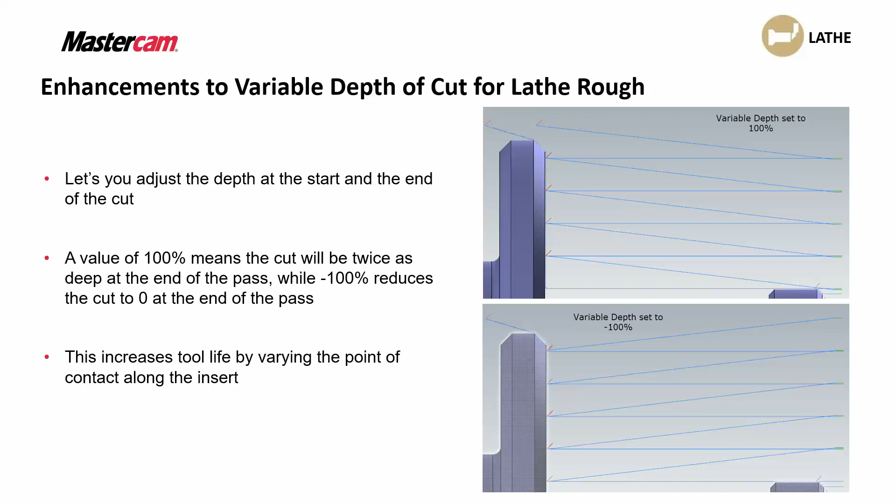Next thing I'd like to cover is dynamic rough has gained the ability to use lead in and lead out on semi-finished passes. So it's just like the lead in and lead out you've seen in plenty of other toolpaths, but now we have the control to take care of lead in and lead out for the semi-finished passes. So I'd like to show you guys how to do both those things I just mentioned.

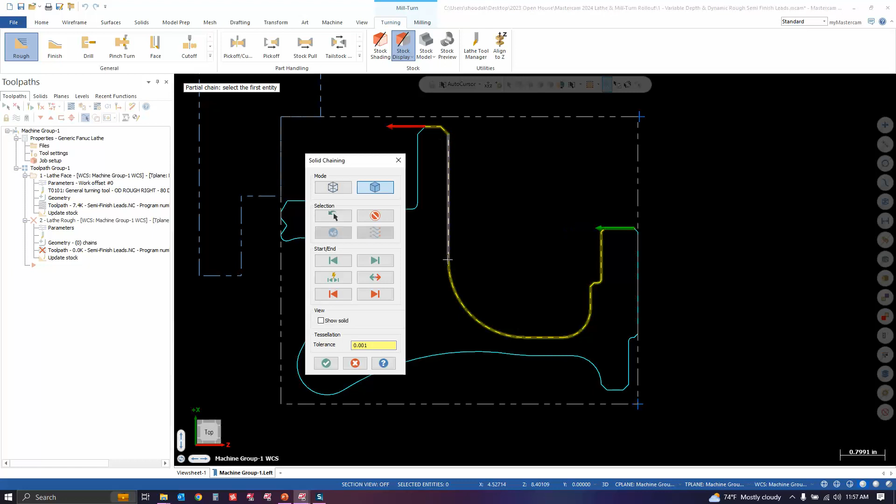So what I've got here is a part. I'd like to rough this down using lathe rough and then hop in with a dynamic rough to finish the groove portion. So I'm going to hop into my lathe rough toolpath. I'm going to chain the top here to the top here, hit the green check.

And for starters, what I'm going to do is I'm just going to set the depth of cut to 200 thousandths with no real change. Use lead in and lead out and use stock for outer boundary. I'm just going to turn off the rapid retract motion to see it a little better. Pretty standard pass. What I'd like to do is I'd like to introduce that variable cut depth.

So what I'm able to do here is, let's just say we add 50% depth of cut. I hit the green check. What we're going to see is the first pass remains the same, but the next pass is going to start at a 50% larger depth. So we should see 300 thousandths start a cut here and go to 100%. So I go to 100 thousandths.

On the next pass, we're going to see the opposite. It's going to start at 100 thousandths and it's going to end at 300 thousandths. Again, just to reiterate, what this does is this is going to change the edge of which the insert is cutting with, hopefully using more of the insert, hopefully reducing the chance of chip out.

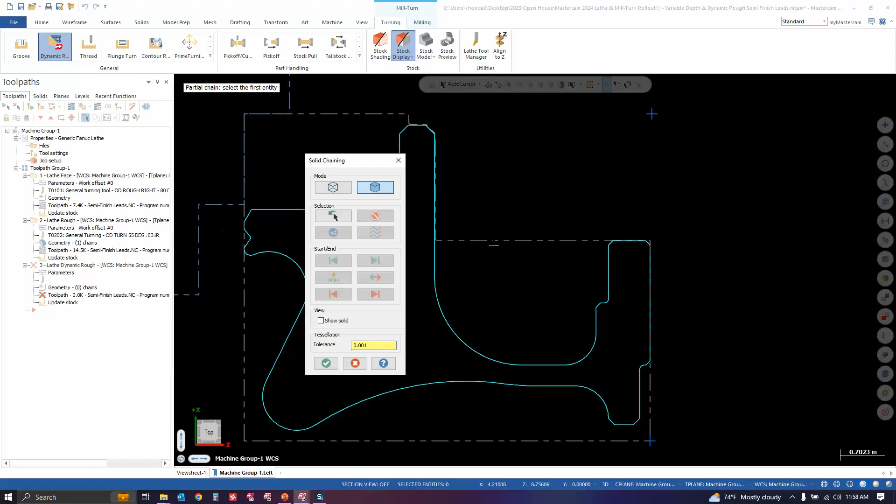Next thing I'd like to cover here is dynamic rough. So I'm going to go roughly the same area. I'm going to start at the chamfer there, end at the chamfer here, and hit the green check. I want to make sure that I'm choosing a full radius tool. Only full rad and button tools are supported for lathe dynamic rough.

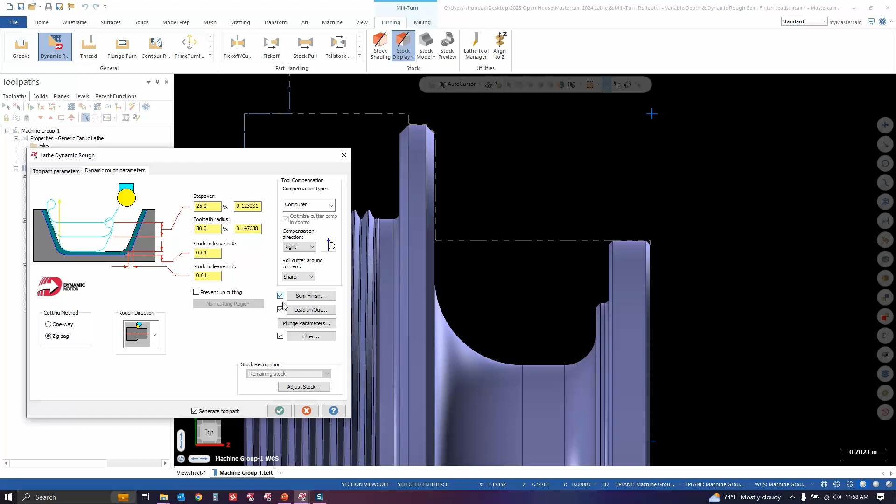I'm going to go to the dynamic rough settings, set my step over to, let's just say, 25%. We're going to go to 30% for toolpath radius. I'm going to turn on my semi-finish, and let's just for now turn off lead in and lead out. I'm going to hit the green check. It's going to take a minute here to think, and we're going to see a toolpath create.

Once this generates, we're going to see that we have now violated the tool clearance boundary. I'm going to ignore this warning for now and hit the green check. What we're going to find is that

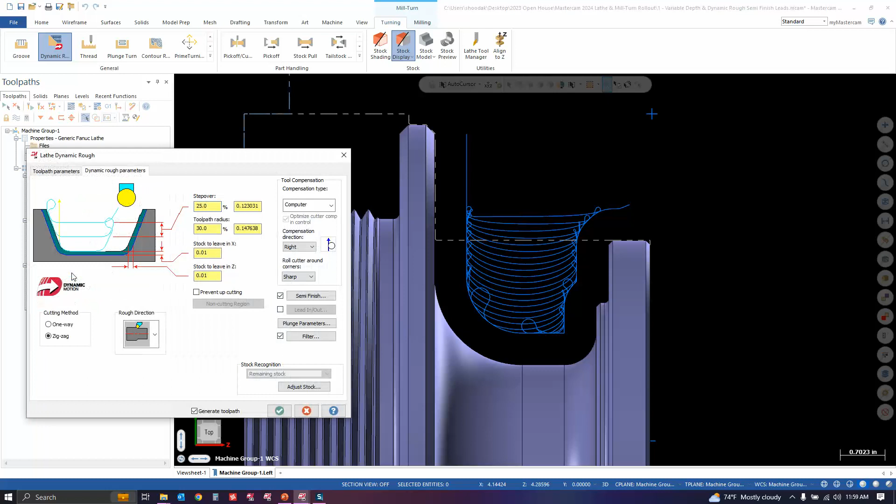if I go into the parameters here and I enable lead in and lead out, and I head over to the semi-finish lead in, tell it to go directly down or even tangent, I can do the same thing with the lead out and go directly off to the side. I'll just keep it like that. Hit the green check, and we should find that that error now goes away.

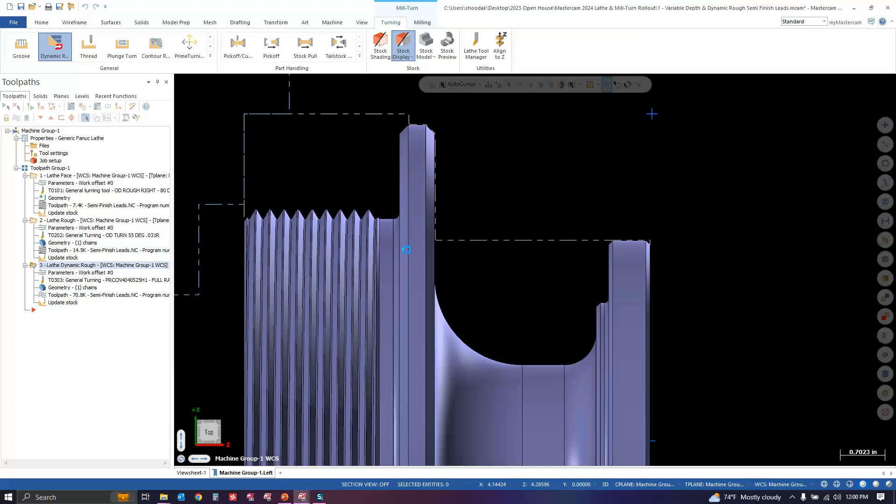And we do. So everything is all even keel in the world again, and we're able to continue on.

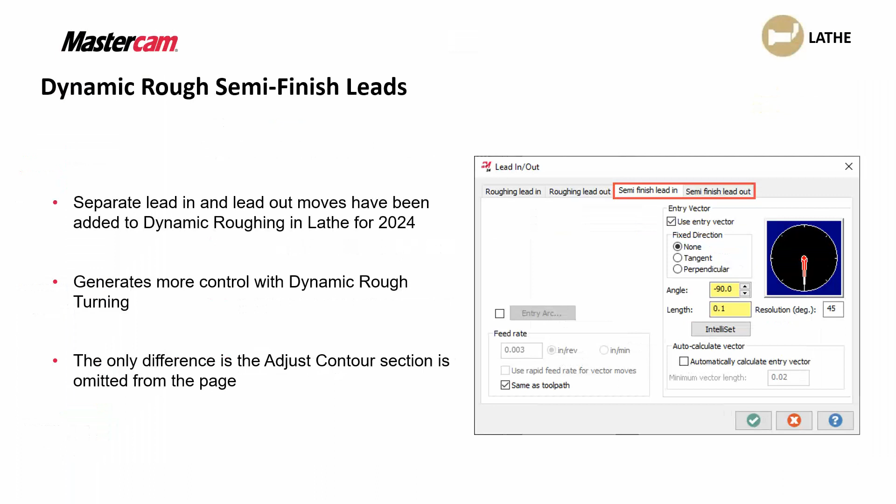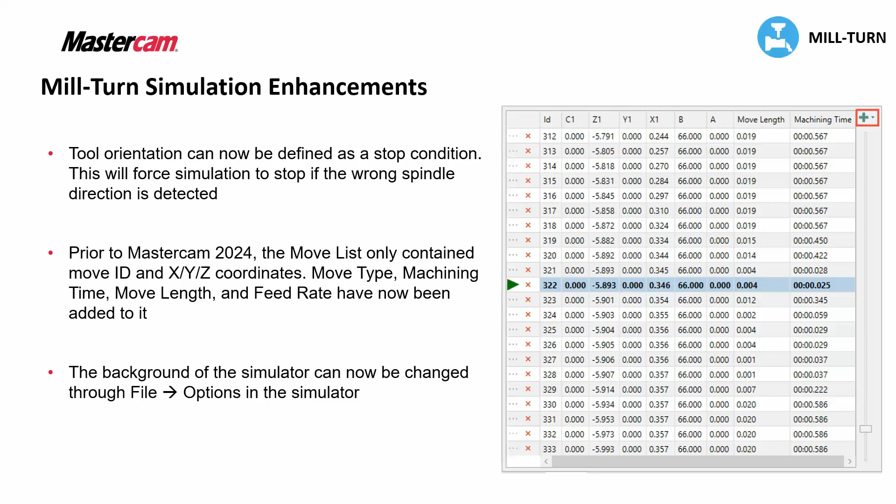And the last thing is now stop conditions have been added to incorporate tool orientation. So what does that really mean? Well, that just means if your left spindle should be rotating clockwise, but it's rotating counterclockwise, Mastercam is going to let you know. It's going to stop the machine, stop the simulation, so that you can go back and fix what's wrong and then be able to continue on your merry way with your new fixed simulation.

Another new thing that was added was creating a new spindle origin for spindle move operations. So what this does is this gives you the ability to generate a new set of planes whose origin matches the new location that you select. It gives the ability to associate a new origin with the new position. This gives it so that you can add a G55, G56, G57, and have your move work off that position.

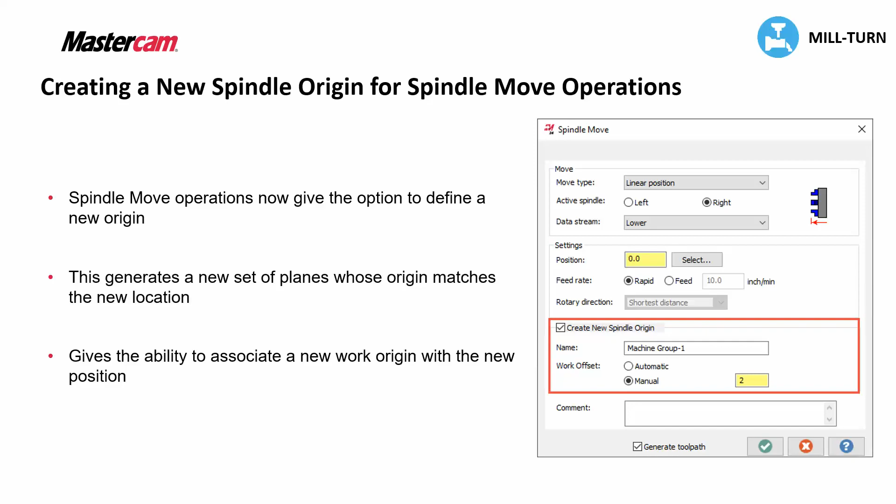B-axis contour enhancements. There's 3 of them this year. So the first one is the adjust stock button. This is going to look a little different than your traditional adjust stock in other toolpaths. This is going to show up with 3 little white dots on each start and end portion. You're able to snap to these different positions as a quick way to move through your toolpath. So we can extend the cut, add a chamfer, remove the chamfer just by clicking on one of these 3 buttons. You can move it anywhere else, but the 3 white dots that show up are easy snap locations. I'm going to show you guys this one here in a second.

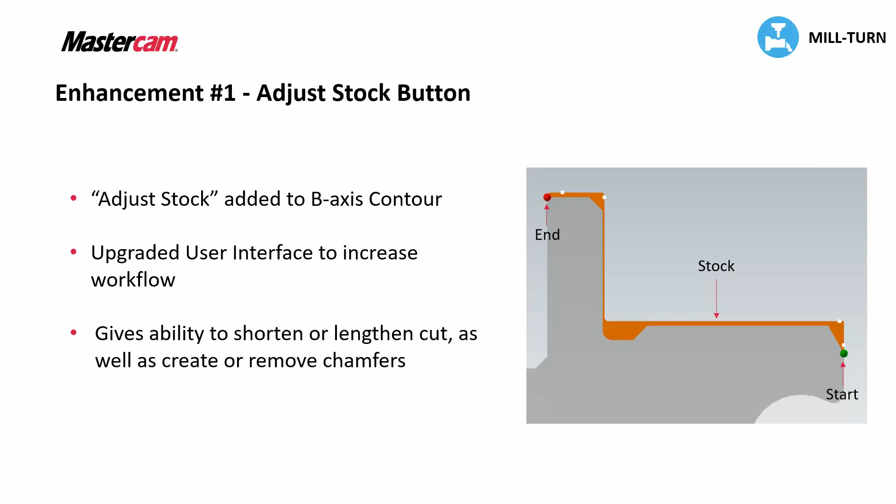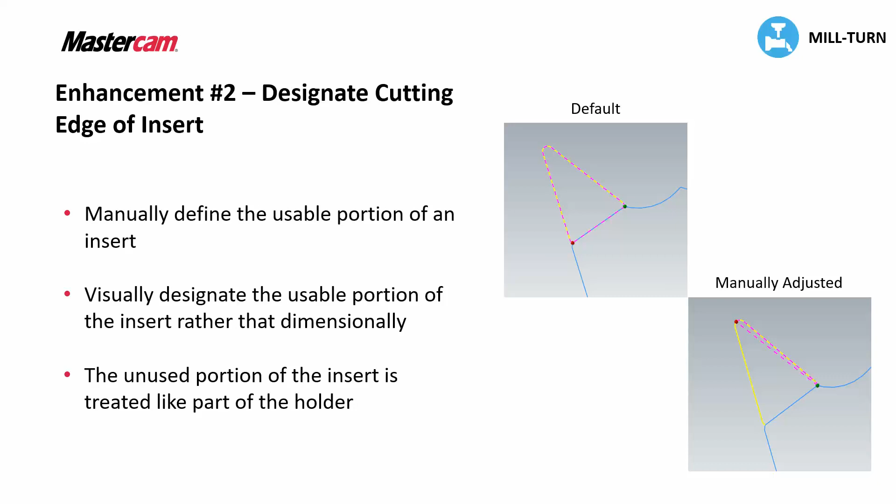Another thing that got added is the ability to designate a cutting edge of an insert. So whatever tool you're using, you can actually select where you'd like to cut with that insert. This gives a little bit more control to the B-axis contour, and this will actually adjust the toolpath to compensate for your selected geometry.

Another thing, the final thing that got added to B-axis contour, is the ability to change the tool axis control option to modified. So prior to this, you were stuck with automatic and manual. Automatic was pretty much Mastercam deciding most of the toolpath motion with a little bit of room to tweak. The other option was creating geometry, creating toolpath vectors, and having the toolpath follow those vectors. Well, this is a little bit of a combination.

So what you get to do is you're able to actually alter these green arrows, and I'm going to show you this here in a minute. You're actually able to alter these green arrows and change where the toolpath sits at this certain position. Nice quick way to make a very controlled toolpath. So let's talk about that here next.

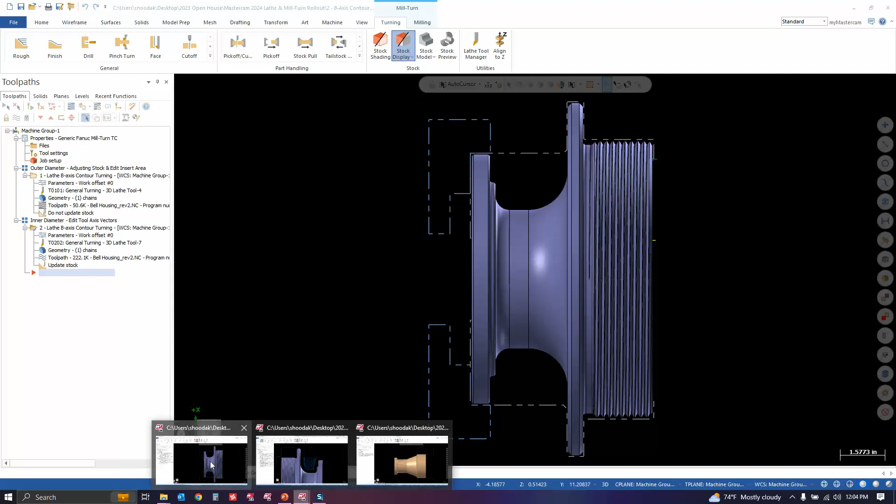So I have another toolpath over here, another 2, both B-axis toolpaths. So looking at this, we got our first toolpath here. I'm going to hop into parameters, and we're going to take a look at adjusting stock. Right now we're getting a toolpath that kind of starts off into the material and ends up before the material ends. I'd like to make it so that I maybe start a chamfer down here and elongate the cut along the end. So if I go to the second last option down here at the bottom called stock, I can hit my adjust stock button.

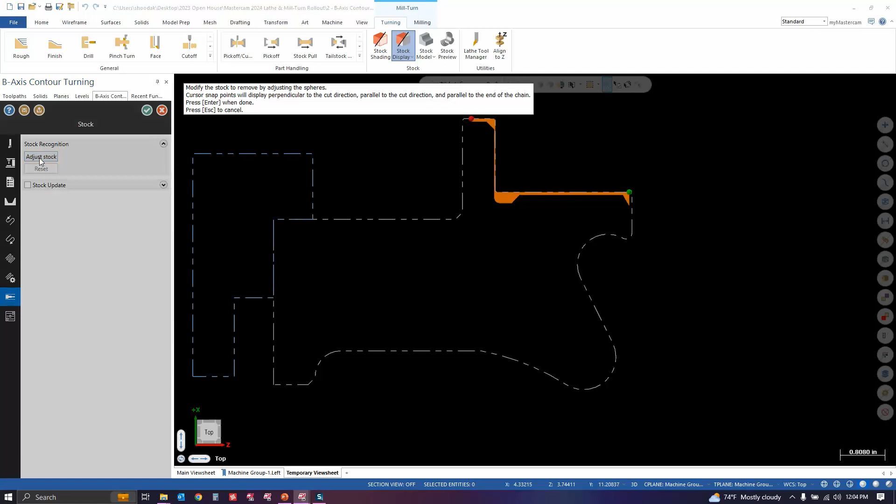I'm able to grab my green dot and bring it down to this far white one at the end, and I can actually snap to it. I'm going to do the same thing with the red one here. The minute I click or hover over the red one, I'm going to see those 2 other white dots appear. Notice as I'm rotating, I'm seeing the orange area change. That is also indicating where my cut is going to end or start, depending upon which one I'm selecting.

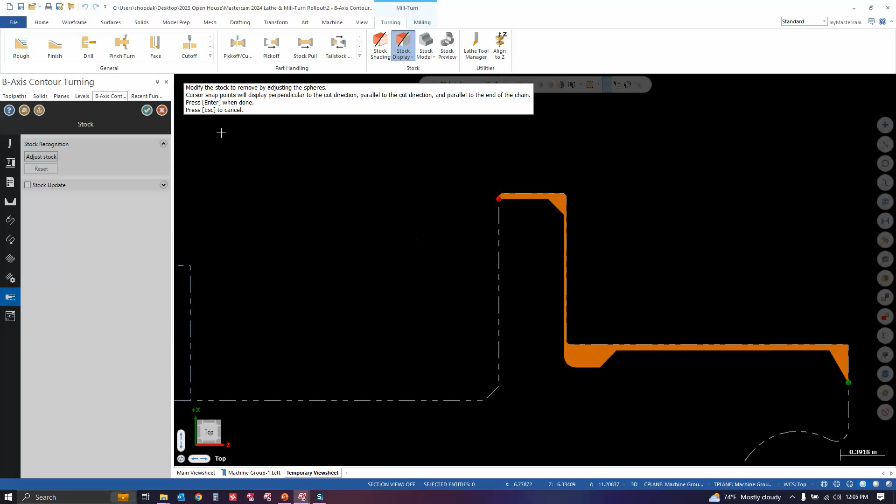I'm going to hit enter, and I'm going to hit the green check and regenerate my toolpath. And what we're going to see here is what I set out to do is going to be completed. I'm going to elongate my chamfer here, and I'm going to elongate my cut here at the end.

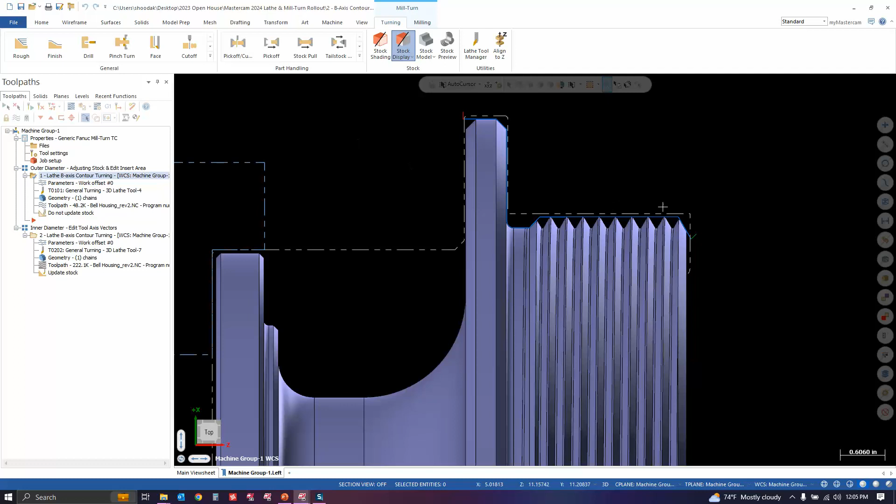Looks great. Next thing I want to do is adjust the cutting edge of my insert. So one more option up, going advanced motion control. Where it says maximum insert depth, I can go down to manual, click on this icon here called edit depth, and we're going to see my tool populate, my insert and holder combined.

I'm going to grab, again, my start or my end dot, and I can actually see where the insert's going to be cutting with. So what's going to happen is, when I do this, what's not highlighted is going to act like a holder, and it's going to make sure it avoids that cut. So if I have this pink area selected, it's going to avoid cutting with the top portion.

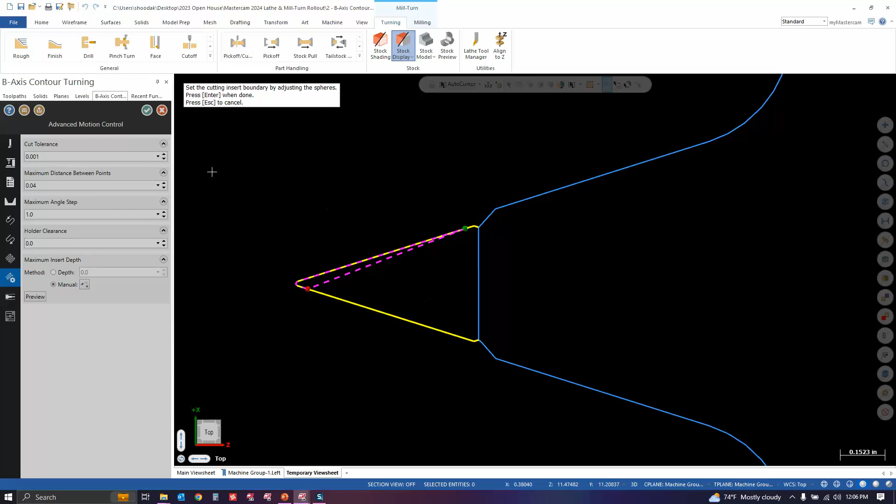What I'm going to do here is I'm going to slide this cut up, maybe this down here, and I'll hit enter and the green check, and we're going to see that the motion now fits that geometry. So again, it's going to prioritize cutting and prioritize avoiding the area that's not highlighted.

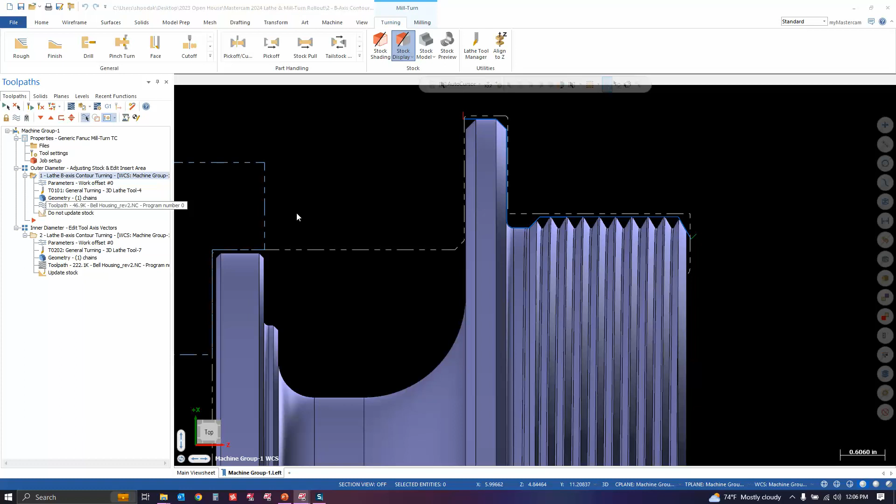If we play the toolpath, we're going to see that it stays in that area. Make sure that it doesn't cut that way. Looks good.

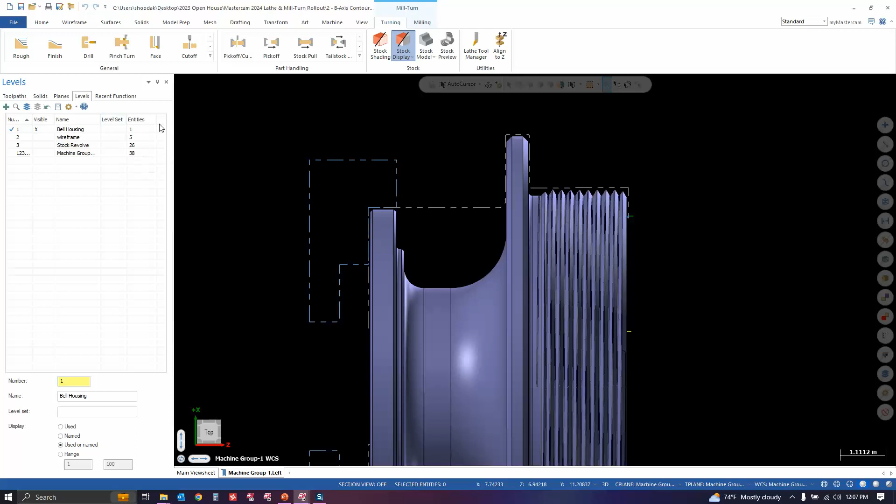Last thing I want to take a look at is this ID here. Now I can't see it, so I'm going to go to levels, and I'm going to go turn on planes, and I'm going to turn on my section view. And this will make it so that I can see the inside of my part. If I go to my toolpath and I go to my parameters here, and I go to one more option up where it's basic motion control.

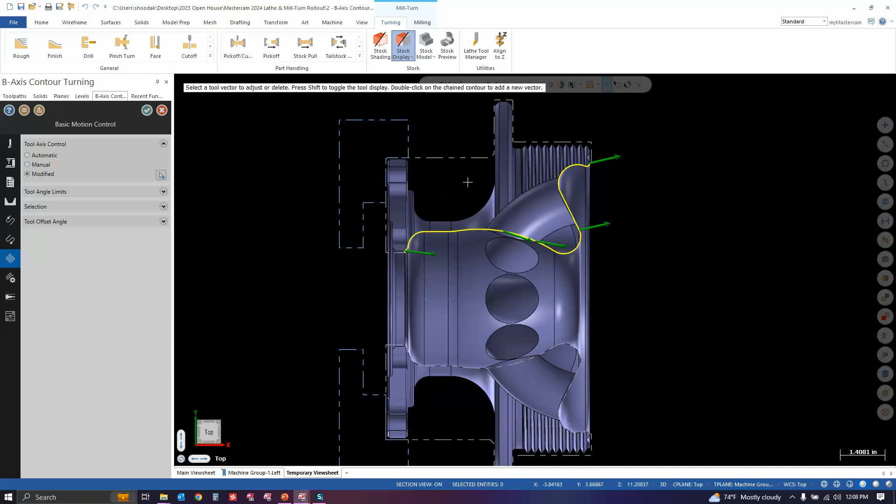Prior to 24, I had automatic and manual. Now we have this modified option where I can select modified and click my edit vectors. And what I'm going to see are 5 arrows populate. And if I hover over one and I click one down, if I rotate this arrow around, I can actually see my tool and my holder. I can actually change the position my cut starts or rotates to, and we're actually going to see here if I go too far in one of these directions, maybe on another spot.

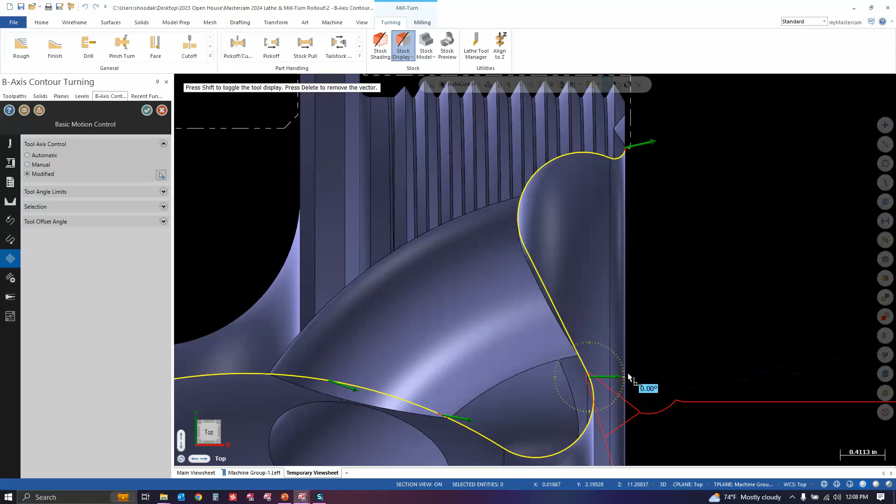If I hit escape real quick and go to over here, I can actually see if I tilt too far that I actually create an area where my holder and insert collides with my cutting edge. So this is a nice quick way and a safe way to make toolpath motion altered in just a couple seconds.

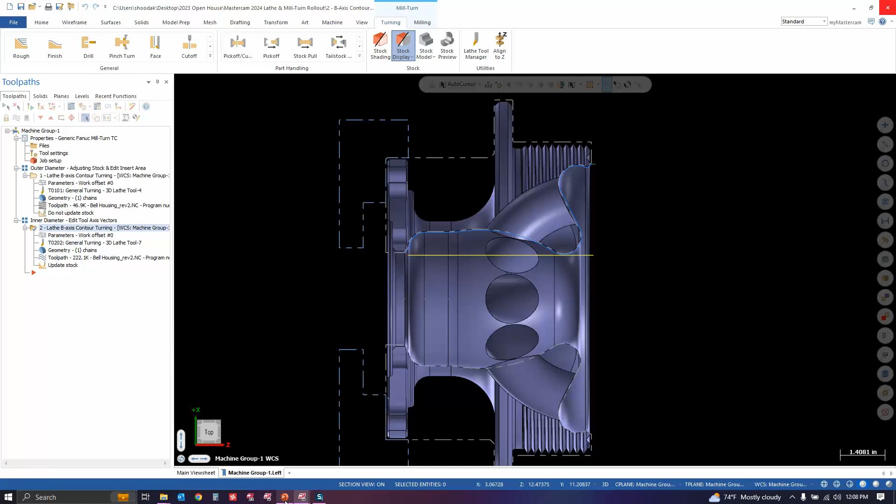All right, here's another big one. Turret-mounted angled milling heads. This is now completely supported inside Mill-turn. So I've actually already helped a couple customers with this already. We've got maybe twin turret, twin spindle machines, or single turret, twin spindle. We've got an angled slot, or we've got an off-center bore we have to mill.

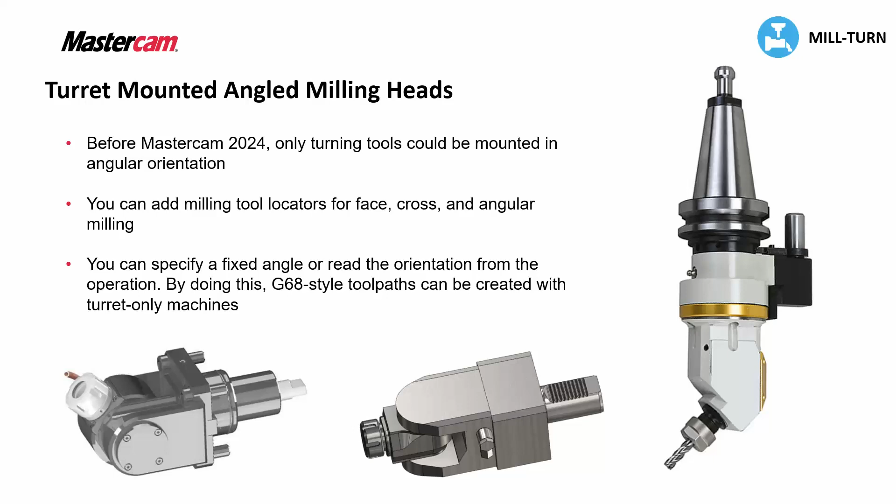Now inside Mill-turn, we can completely add solid models for angled milling heads, whether it's fixed angles or adjustable angles. This gives us the ability to create G68 style toolpaths on a machine that otherwise couldn't handle them. So let's take a look at doing those right now.

All right, so I've got this part in my sub spindle over here. What I've got is a pretty simple hole, and I just want to mill out that hole, mill out the counter bore. So setting this up is going to be pretty simple. Once we've added it to the component library, using it is a breeze.

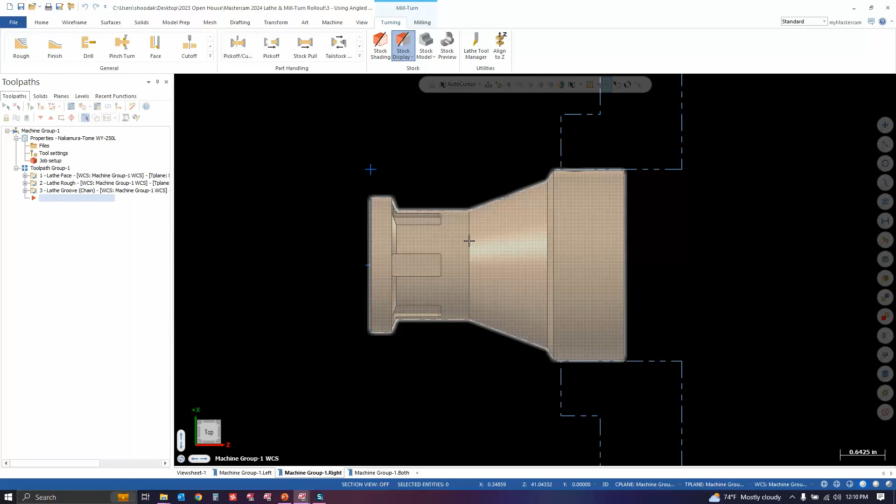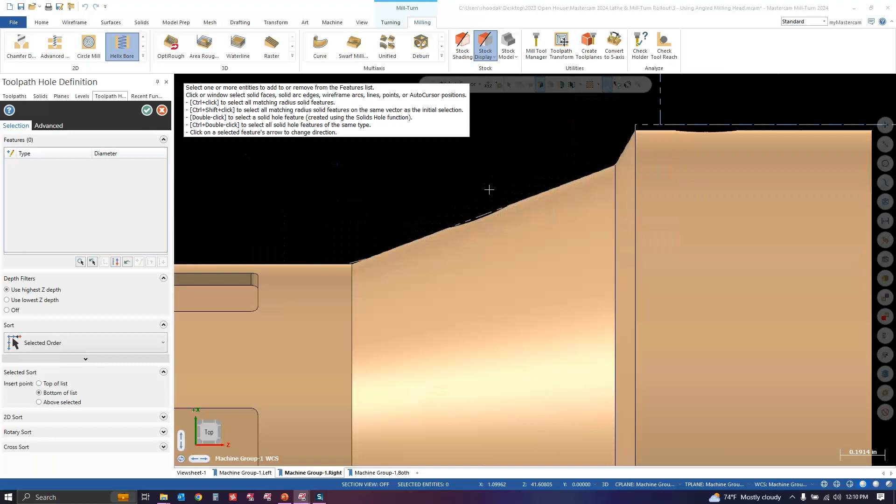I'm going to go to milling. I'm going to hit the drop down, and let's go to our hole making toolpath. We'll keep this simple. Let's do a helix bore. What I'm going to do is I'm going to go find my geometry, and I'm going to pick the solid wall of my geometry. For those that aren't used to doing this, this is the way we recommend.

Notice picking the solid face shows solid face, and it also shows the corresponding diameter. This is going to be very helpful for multiple different reasons, and I'm going to go into those here in a second. I'm going to hit the green check. I'm going to go to my tool page. I'm going to go right-click, Create Tool. I'm going to go to Flat End Mill, and I'm going to make a .1875 flat end mill. I'm going to hit Finish.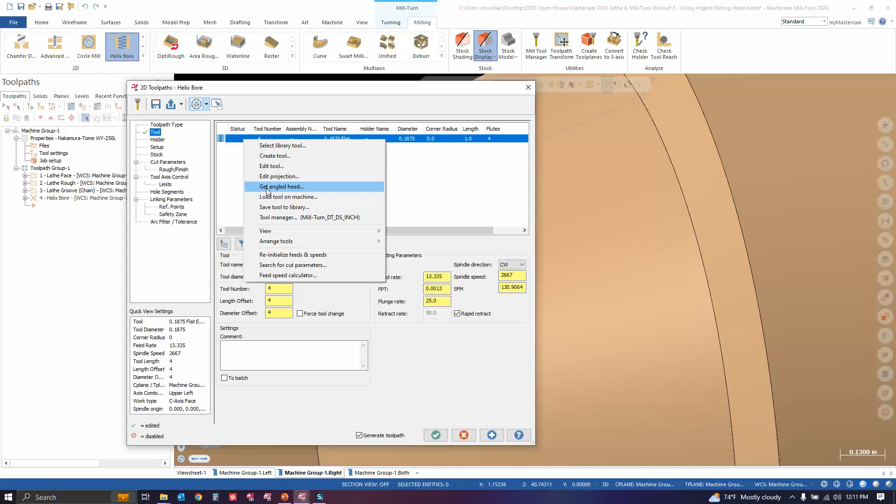Now, to enable the angled milling head, I have to go right-click, Get Angled Head. We're going to see this show up. Note that my tool 4 is the one that's using this, and I should have this loaded in already.

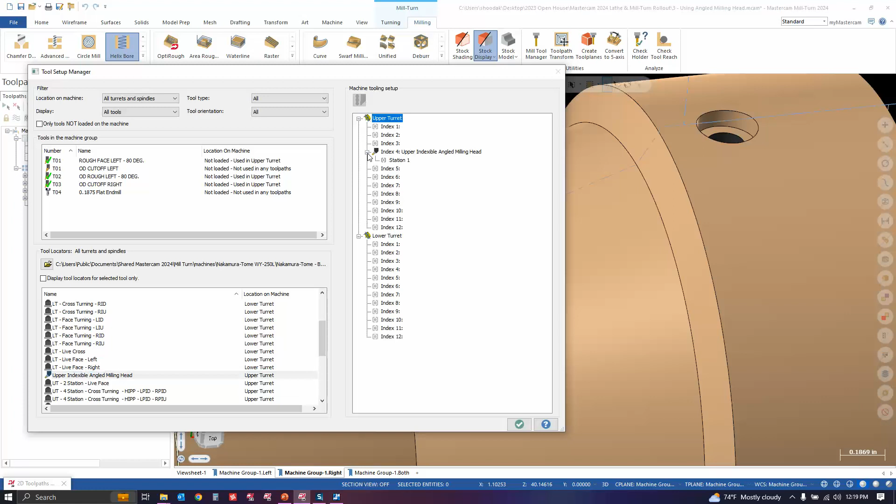I'm going to grab the upper indexable angled milling head, bring it to index position 4. I can hit the plus, and I can bring my tool in. So now if I go right-click, View Component and All Children, I should be able to see my angled milling head. We'll adjust the tool holder to make sure it fits in there. Doesn't quite look in place, but we'll be able to get that adjusted later. Hit Enter. Hit the green check, and I'm off to the races.

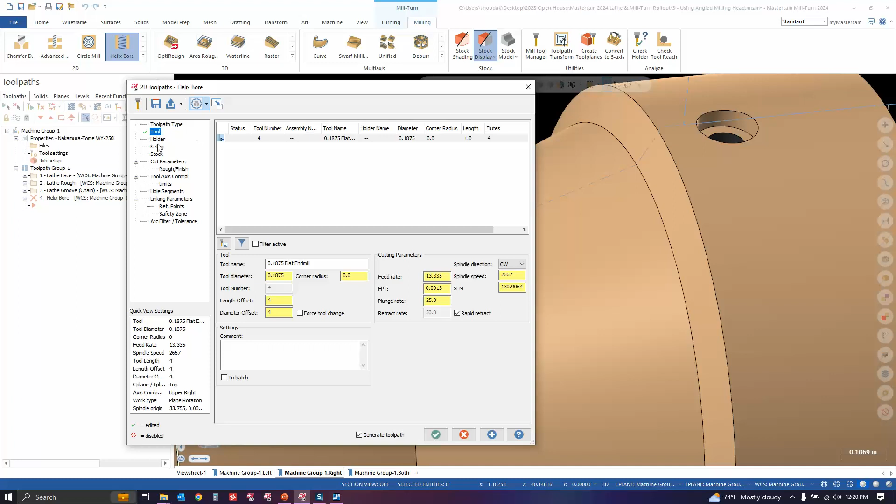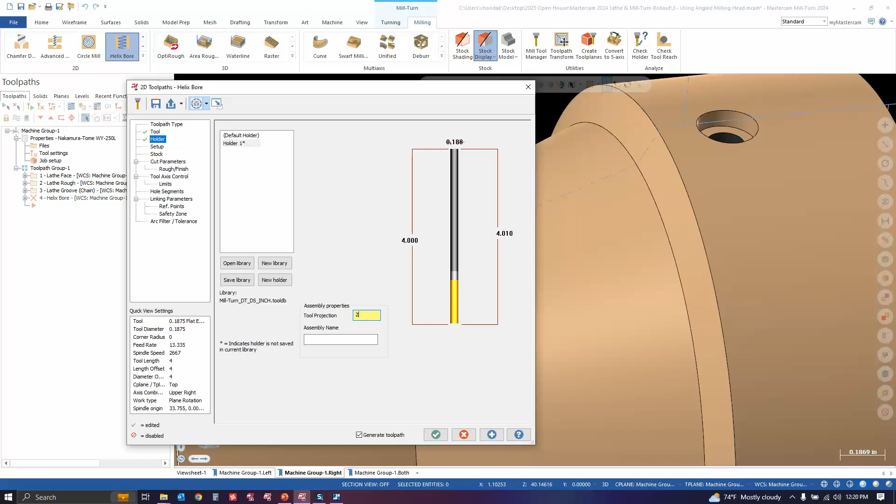So now what I can do is I can go to holder. If I really wanted to, I could go right-click, Edit Holder. I would change this to match my tool size if I were to do a quick fix. 187.5 for the top, 187.5 for the bottom, and I could go like 10 thousandths. Hit Finish, and it's going to look a little bit more normal. Change the tool projection to 2 inches, or whatever works, and now I can go to Setup.

I'm going to have it set to plane rotation, derived from geometry, and that should make it so that the angled milling head aligns to this hole right here. I'm going to go to Cut Parameters, and everything else here is like a normal helix bore. So I'm going to go perpendicular entry. I'm going to go 0 on walls, 0 on floors.

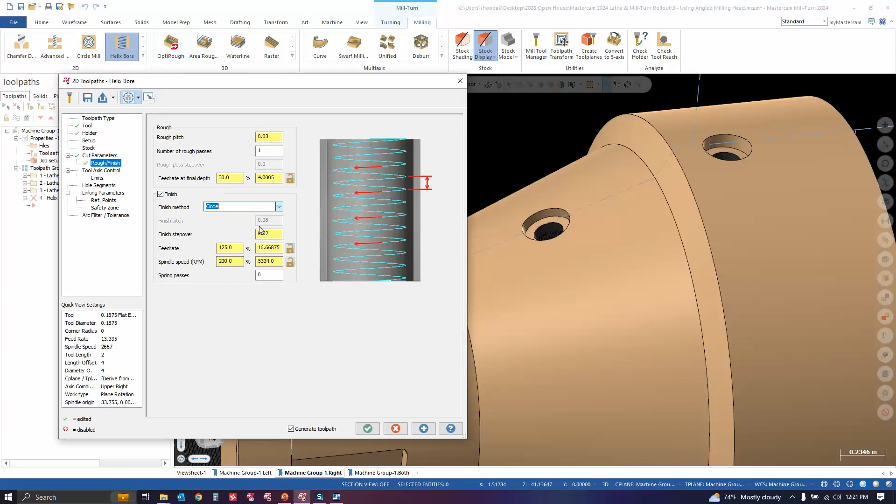If I wanted to enable cutter comp, I could enable a cutter comp. Maybe I'll do a 30 thou rough pitch, and my finish will be a circle at the bottom. And I can make the step over finish at 10 thou. Tool axis control will remain the same. And heading to linking parameters, this is the important part of why we pick the solid wall.

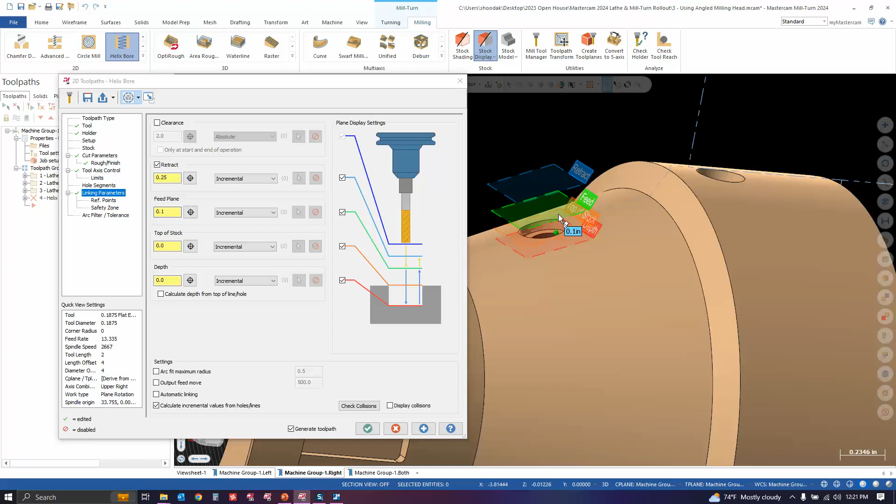By clicking on calculate incremental values from holes and lines, I can set everything to where I want it. So if I set my top of stock to incremental 0, notice that my top of stock is where it should be. My depth is where it should be. My feed plane is 100 thou from the top of stock. My retract is 250 from the top of stock. And now I can turn on clearance and go 0.75 and set that also to incremental. And my values look good.

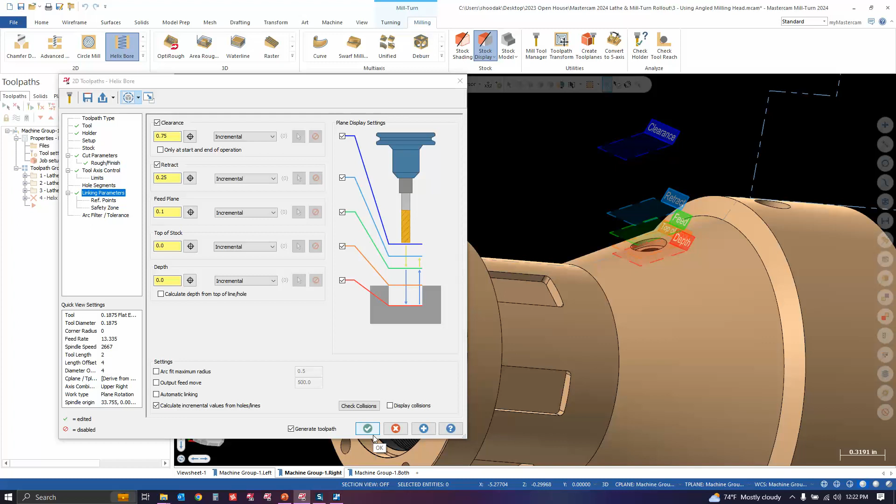Now, if you haven't seen this before, this is for 2024. All the hole making operations get these planes, these colored planes. Makes life a little bit easier to tell what's going on. So if I hit the green check, we get our tool path that looks pretty mint. So that looks great.

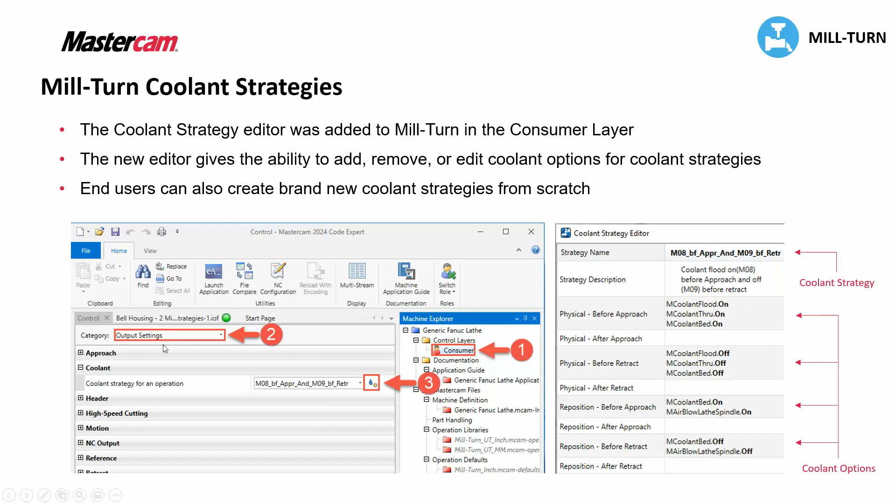You can now edit existing ones, delete existing ones, add new ones, without having to go contact your reseller to go add these options. To get there, you're going to go to Consumer, Output Settings, and then head over to this icon here under the coolant strategy.

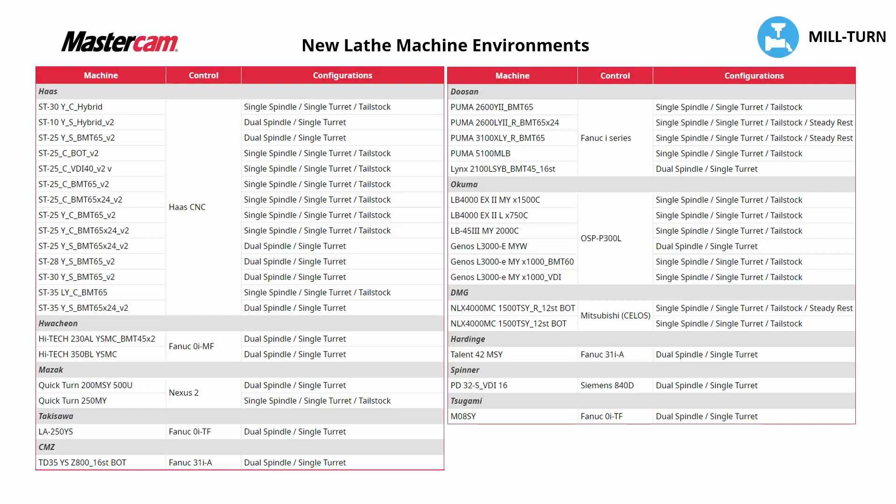So the last thing I want to talk about here is some new lathe simple machine environments and new mill-turn environments. What's the difference? Well, a lathe simple machine requires a seat of lathe and mill to run, while mill-turn requires only a seat of mill-turn. So these are some new machines that got added this year. Some Doosan Pumas, some Doosan Lynxes, some new Okumas, some Haas machines.

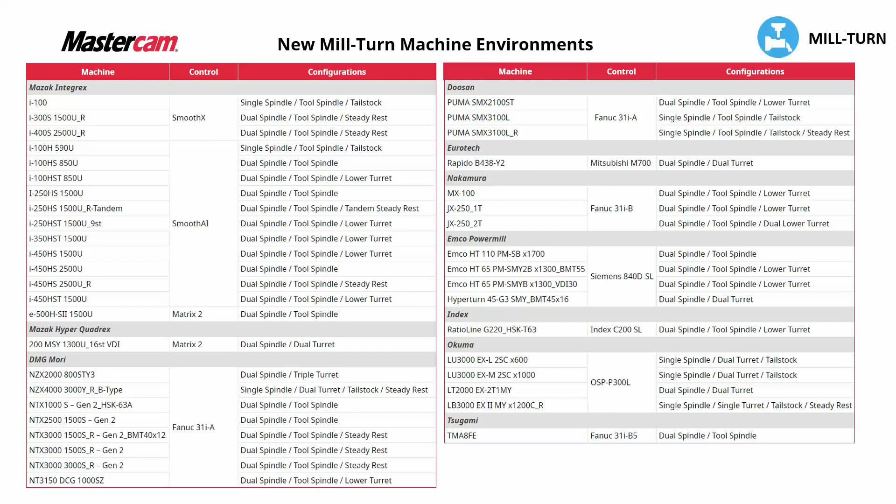And then for the mill-turn environments, we've got some Mazak Integrexes, some Hyper Quadrex, DMG Mori, Okumas, Emco. So we've got a bunch, and this is already on top of our long list of mill-turn and simple machine environments. So only more power to the user going forward.